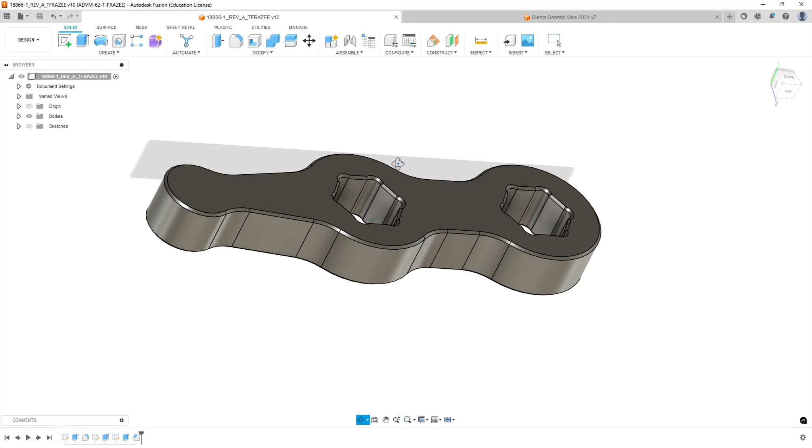This is the CAM tutorial for part number 18866-1 Rev A. We're going to set up the stock and set up the vise for each operation. Our first operation is going to be cutting this held in a vise with parallels and leaving a hat to be removed on the second operation. The second operation is going to require soft jaws, so we'll flip the part over and it'll be facing this way, and it just does the chamfers and cuts the hat off.

So we actually have three programs to do, including a soft jaw to machine. We're going to do this in a methodical way. Let's start off with creating the stock body for the raw material blank.

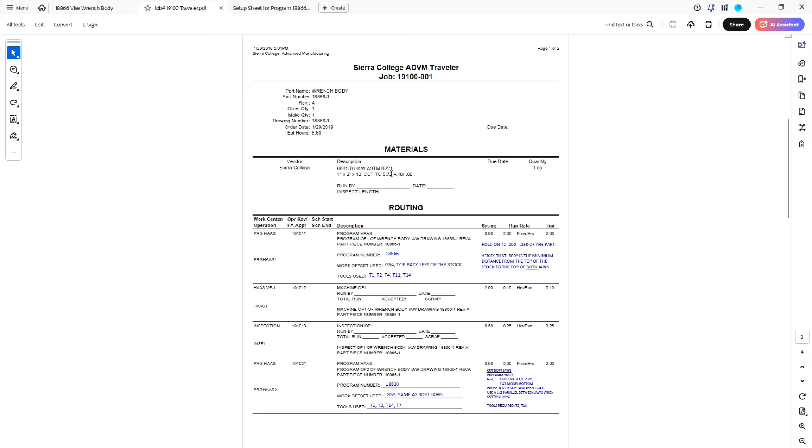If we look at our traveler, our material is 1 inch by 2 inch bar stock cut to 5.72 long, so that's what we want to make. Okay, so let's go.

We're going to start off with a sketch on the top of our part. We'll draw a rectangle and dimension it. So it's 2 inches this way and 5.72 the other way.

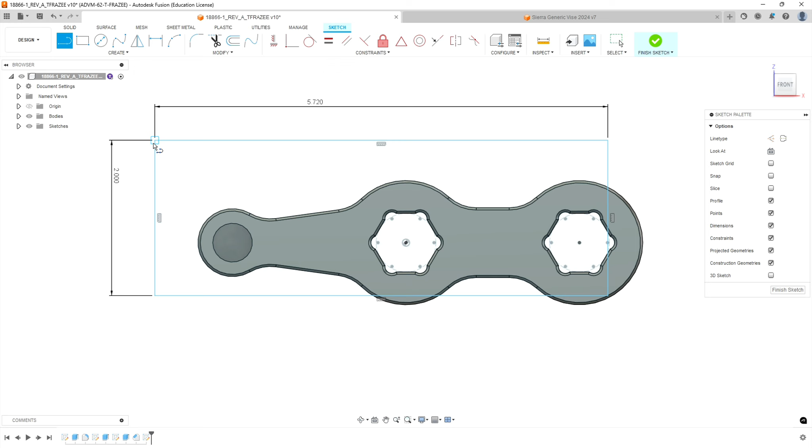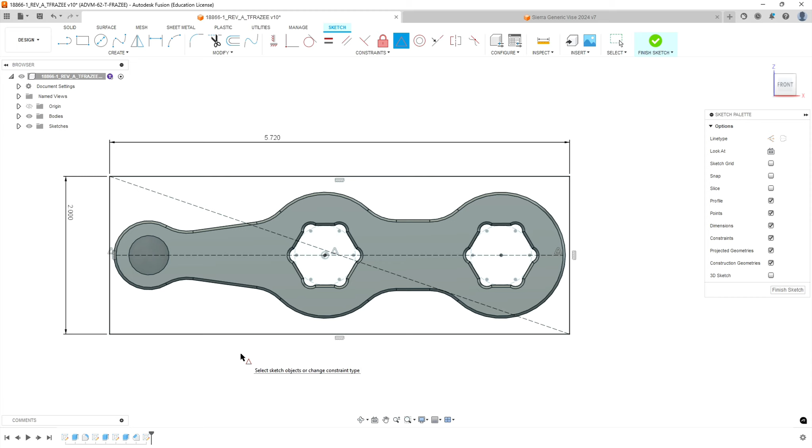Okay, so we've got it centered in our stock. We don't have a huge amount of room on either end, so we've got to be careful when we set this up. We should probably measure that our stock is 5.72. So the next step, we're going to hit finish sketch.

Okay, make sure it's all visible. Not sure why mine was not. Anyway, so what we want to do is leave some material on the top, and the rest of the material will shoot out the other side. We're going to leave 40 thousandths to be removed on the top.

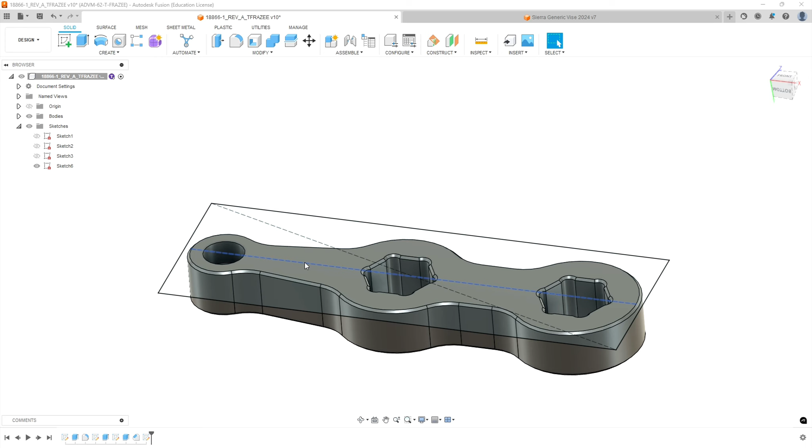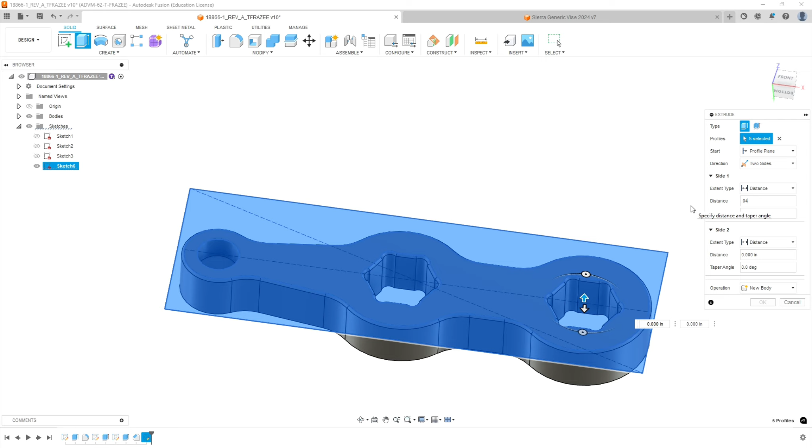So we're going to do an extrude. You're going to select inside of the box, select inside each of these zones. We want to extrude all the way through, and we're going to do two-sided: to the up direction we're going to go 40 thousandths, and in the opposite direction 0.96, which gives us a full inch. We don't want to do a cut, we're going to do a new body, and select OK.

Now let's expand our bodies and highlight the one that says stock, and we're going to label it stock. And this one we're going to label it the part number 18866-1.

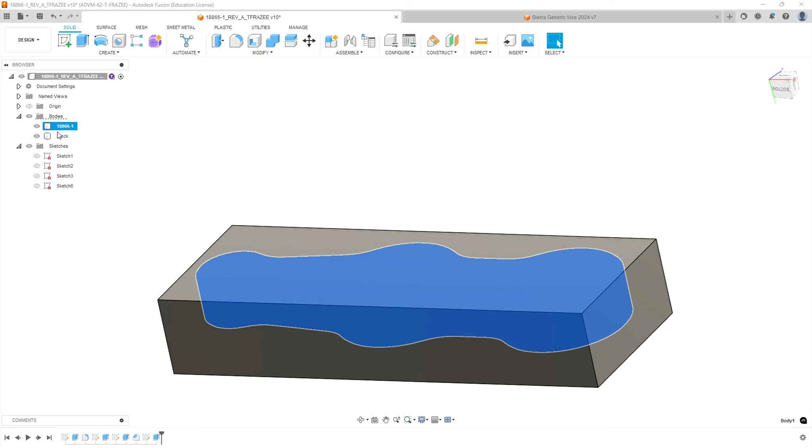Let's highlight the stock, right click on it, go to opacity control, and make it 50% opaque so we can see through it. Alright, so we've got that set up for the first op.

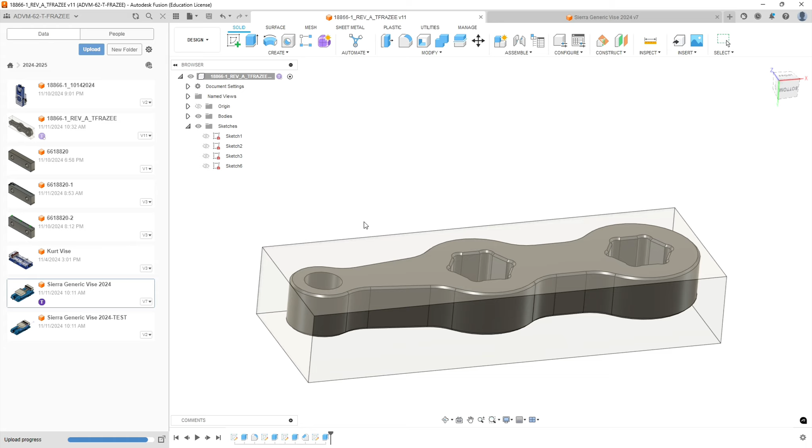Now let's import our vise for the first op. We're going to take our Sierra College generic vise and bring that in. I'll rotate it 90 degrees, and let's move that into a location that looks realistic.

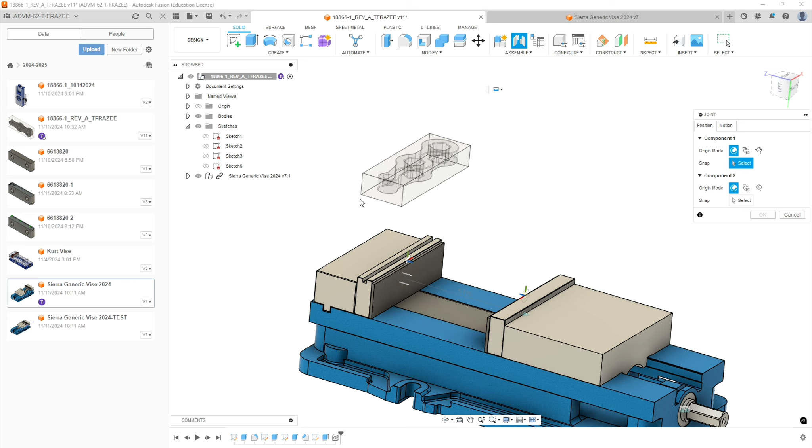We're going to select OK, right click on the vise, and unground it from parent. Now we're going to do a joint. We're going to select the top corner of our parallel, and then the bottom left corner of the stock. It brings it together in a preview.

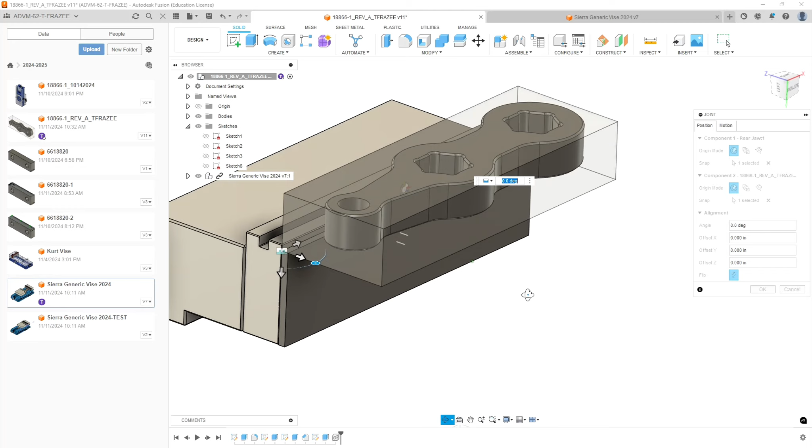And we'll hit OK. Now we go to our vise, and we're going to adjust this spacing to be 2 inches, which will give us a realistic view of operation 1. Okay, operation 2, let's hide the first instance of the vise. Operation 2 is going to be holding this in a soft jaw.

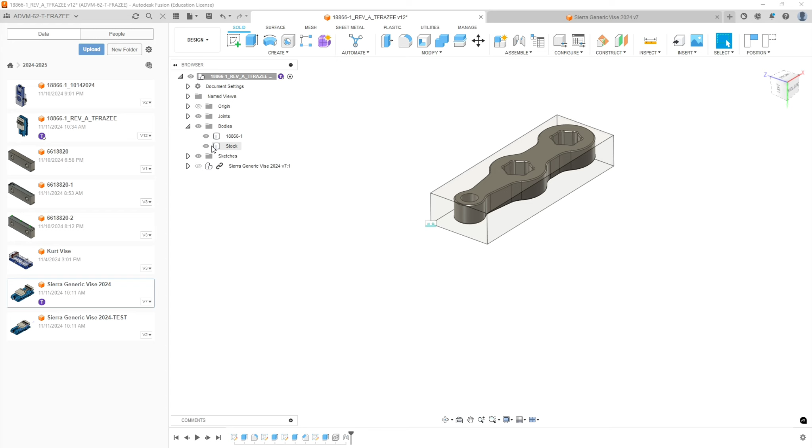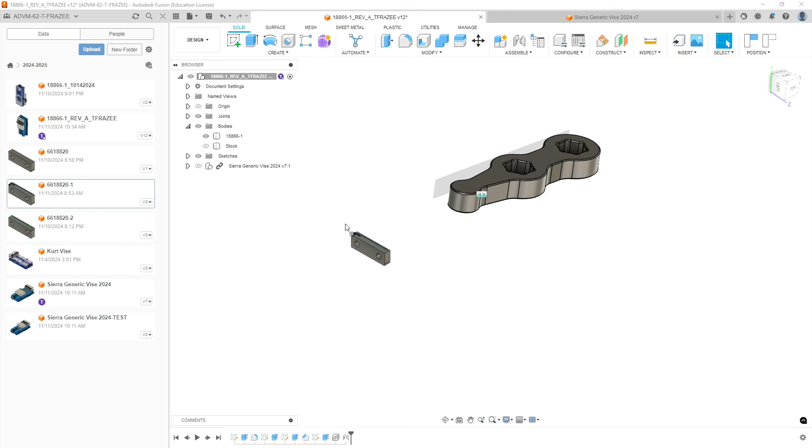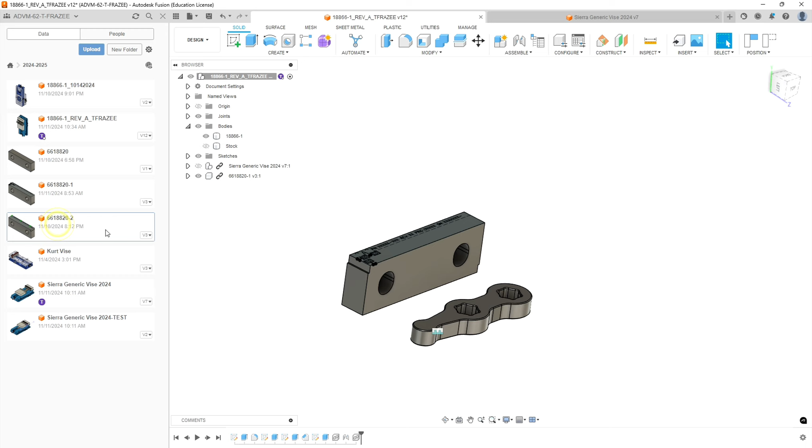And then we're going to do the same thing with the -2, which is the back jaw. And it is backwards. It needs to rotate 180 degrees. Woo. Okay.

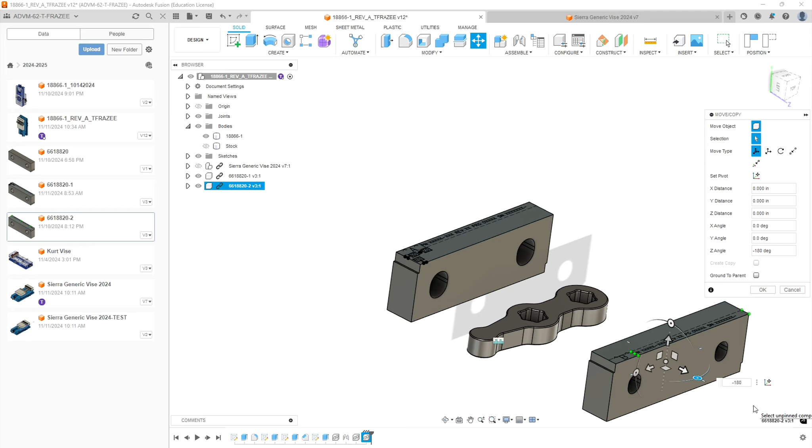And if we look at these, you notice that this one's labeled A, this one's labeled B, and we're going to engrave this information on it. So we're going to need to modify these sketches to match what part we're making. Okay, so

First thing I want to do is mate these jaws together. There's some features that are intentional here. We have this face and this face which need to be in alignment, so that when we take these jaws out and put them back in, this surface we have machined when we make the soft jaw will allow us to align our soft jaws left to right.

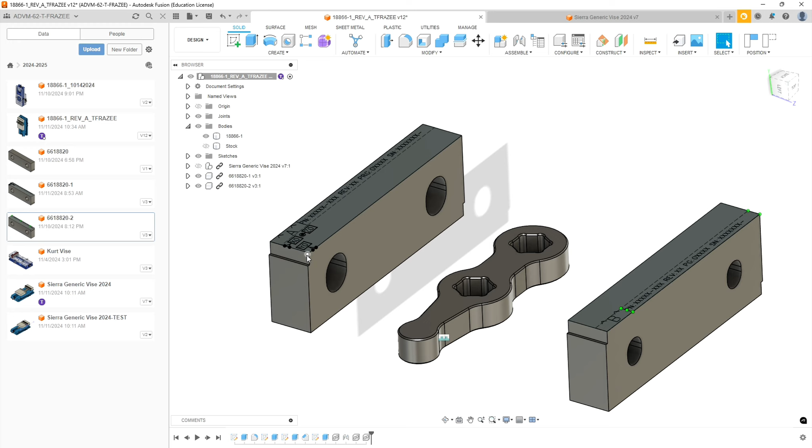So, and then we're going to align the jaws to our part, and this corner here becomes our origin for the machining of both the soft jaws and the physical part.

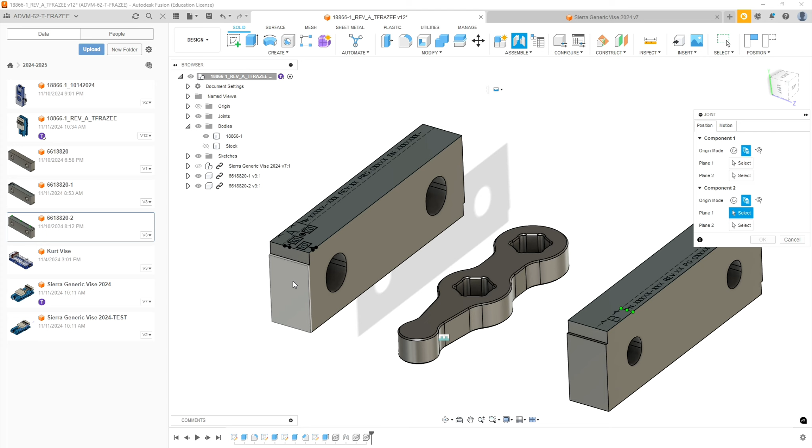Okay, so we're going to use the joint command, and because we have these notches, we don't want to pick on centers of edges. What we want to do is use this second option, between two faces. So we're going to select between two faces on both components, and we're going to select the left and right of one of the soft jaws, and then on the other, the right and left of the other soft jaw.

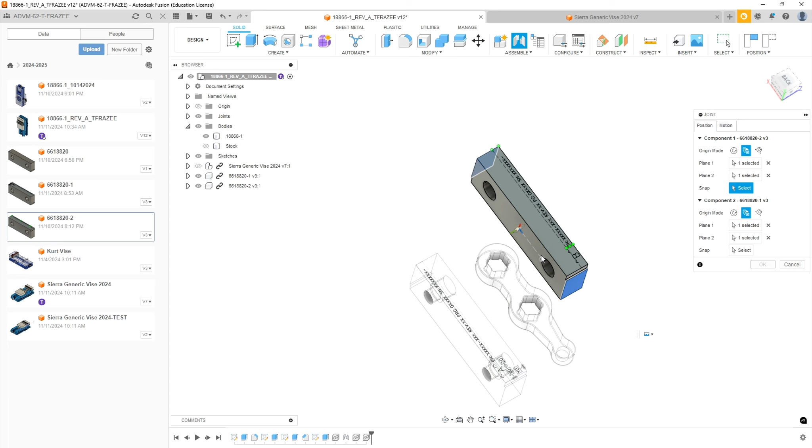And now it's asking for a snap point. We're going to select the snap point of the center front edge, which should be halfway between the two planes we picked, not the edge itself. And then our second snap point will be similar. Okay, now it's going to default to having them touching each other.

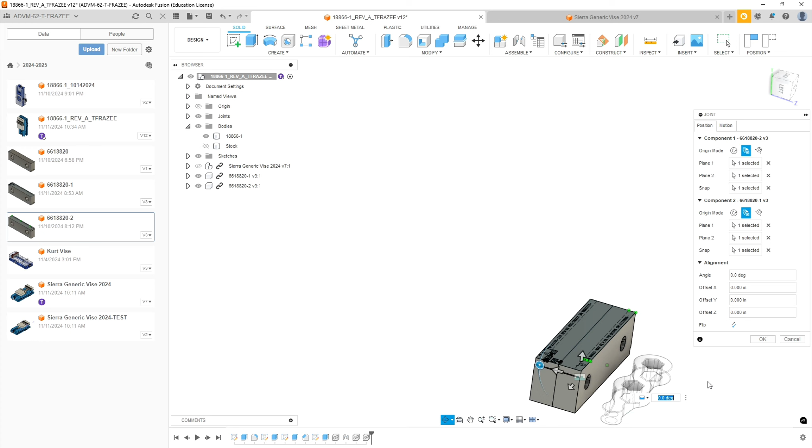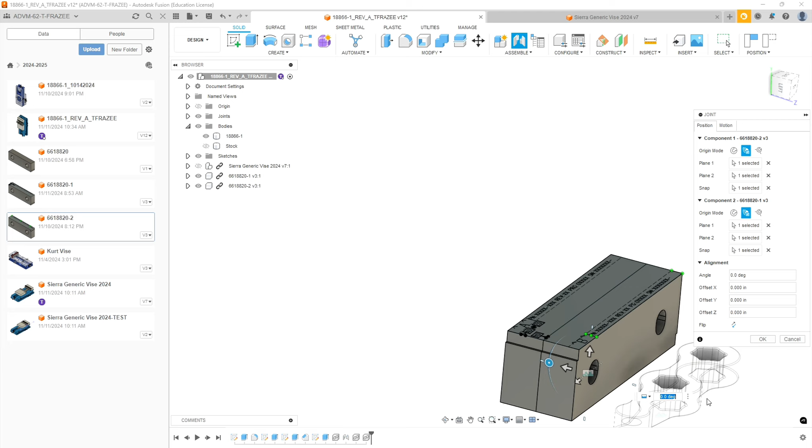What we want to do is back these off from each other so that after we cut the soft jaw shape, we have some room for clamping. Otherwise our part will get loose as that relationship eventually wears out. Okay, so we're going to put a 1/2 inch. So when we actually machine the soft jaws, we're going to put a 1/2 inch parallel in, and then we're going to pull that parallel out when we actually machine parts, so we can put pressure on the part.

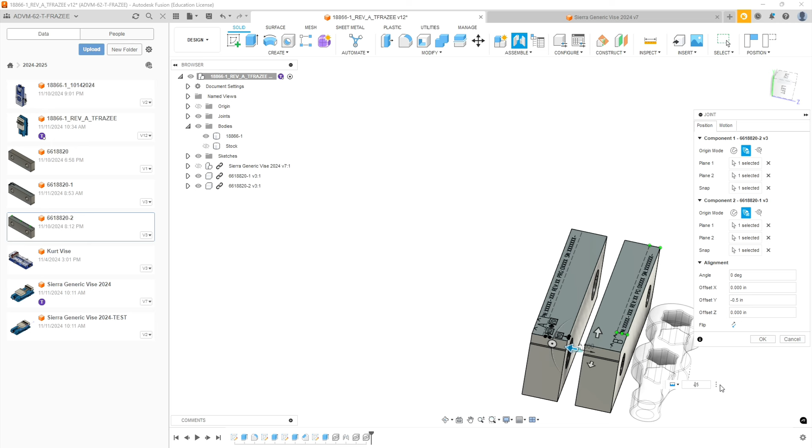Oh, you want to select the axis and put 0.5. I actually had a degree, and we want -0.5. Okay, so they're going to be spaced 1/2 inch apart for this particular item. Sometimes I just clamp any parallel on end in there, and it gives an 1/8 inch of compression. But this is a bigger part, and we want to have room for our text. All right, so let's go OK.

All right, now we need to align this part in relationship to our origin. So when we do that, I'm going to pick up on the center of something and then use an offset to place it, and then we'll use the geometry of the model itself to make the soft jaw.

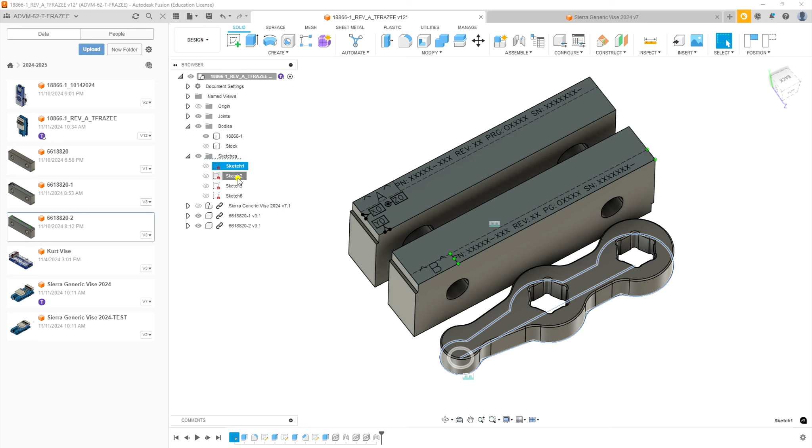We're going to open and expand our sketches, and we're going to find the sketch we used to make one of our hexes. So we have these different sketches. Now, you may have approached yours differently than I did. It's okay if you don't have this point. You'll have to find center. You might have to draw a sketch, but find center of this center hex. Okay.

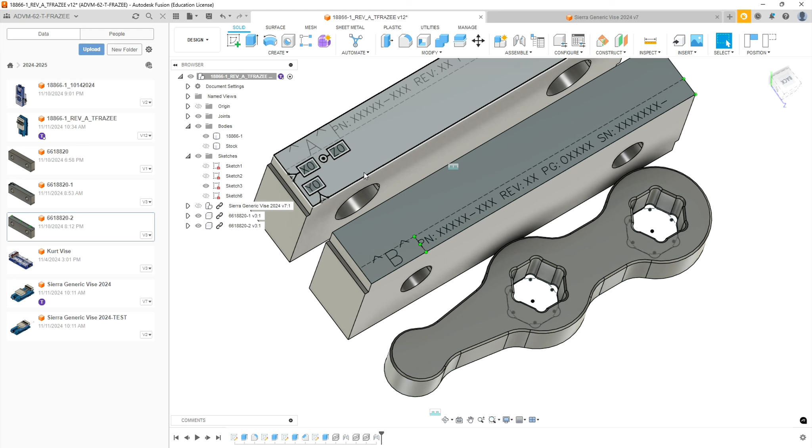And what we're going to do is we're going to do a joint between this corner here and the center of our hex. Okay. Now that's obviously not where we want it. But we want a relationship that we can document, and we can know where the center of this is based off that corner, because we're building to our fixture.

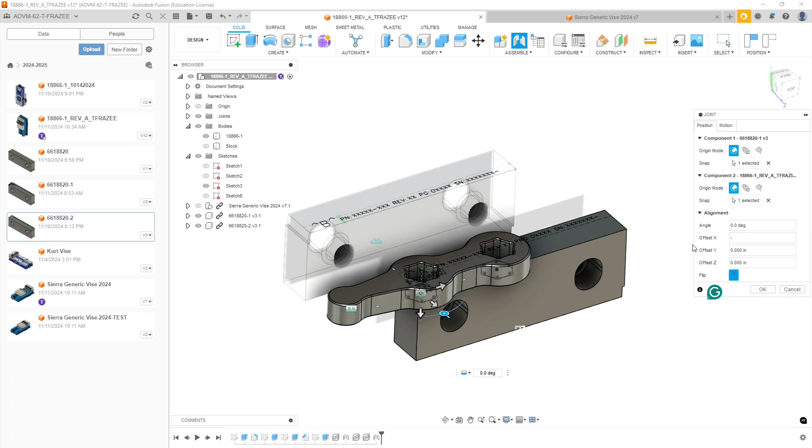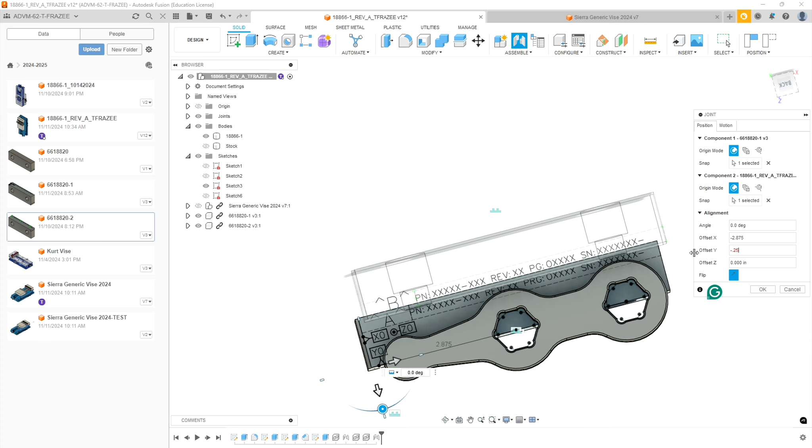Okay. So we're going to go over to the right. We're going to shift in X, negative 2.875. We want to center this object in the center of the two jaws. So our center of our two jaws is shifted in Y, negative 0.25. Okay, because we don't want to capture beyond half the radius on one half of the jaw, or we'll have problems. Okay, this is going to wipe out a little bit of our lettering or get really close to it. That's okay, as long as we know where our Y origin is.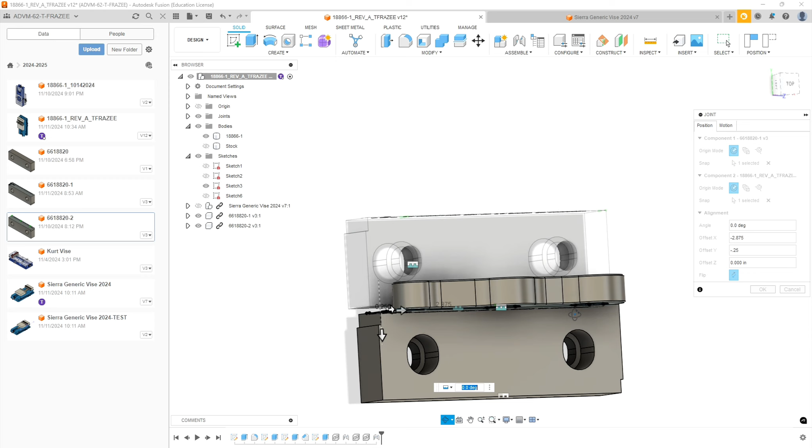Okay. And then now we want to sink it down into the soft jaw. So we're going to go Z offset negative 0.4. And that's going to sink it down 400 thousandths into the soft jaw. Okay. And so this is where our soft jaw is. We are going to take a look at this.

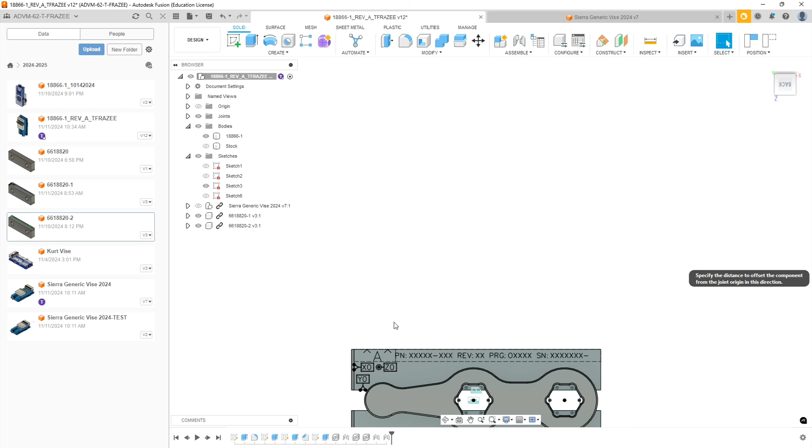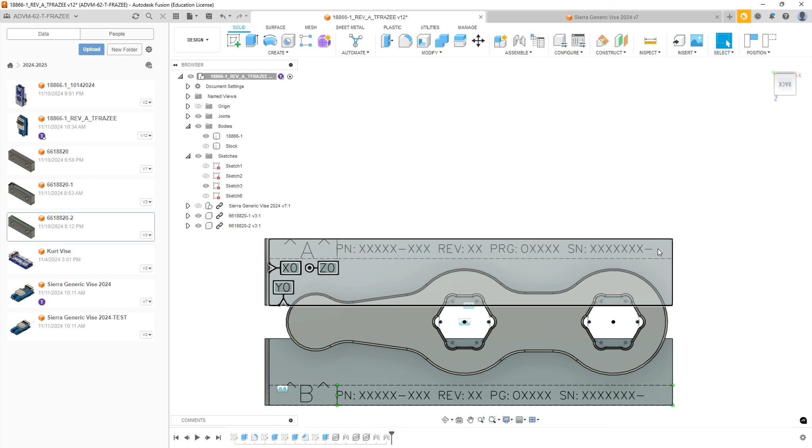So in this view here, we can read all our documentation. We want it engraved on both halves, so if they get separated from each other, we know which one's which. The serial number, we're going to change that to being your student ID number, and then if you make more than one of these, we're going to stamp a number at the end. That way we have this serial number matched with this serial number, and again, if we have multiples of these jaws, we can find them. All right.

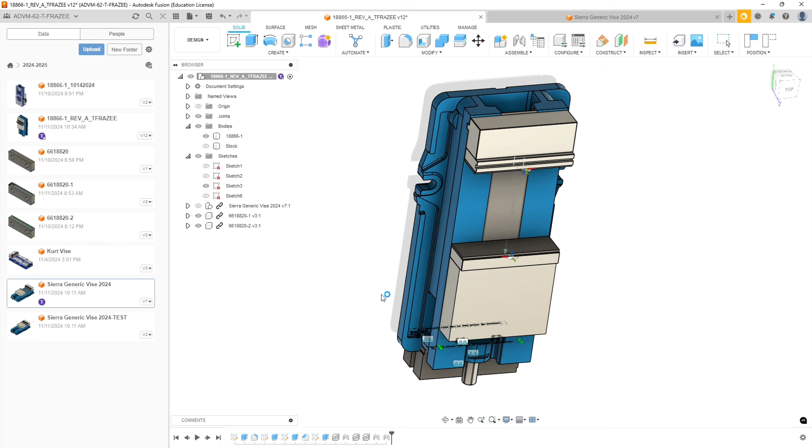Now, let's take this whole assembly and let's put it in another instance of the vise. So we're going to bring in our Sierra College vise, the generic vise, and we're going to rotate this down to 90 degrees. And move this over. And these jaws are going to replace the steel jaws that are in this.

Okay, so we're going to hit OK, and we're going to open up our second instance of the vise, and we're going to open up the rear and front jaw, and we're going to open up the bodies. We're going to make the hard jaw invisible, the two bolts invisible, and the parallel invisible. Still there, but we're not going to see it. Do the same thing with the front jaw. Okay, so the bolts and parallel. Okay, now we can collapse all this back up,

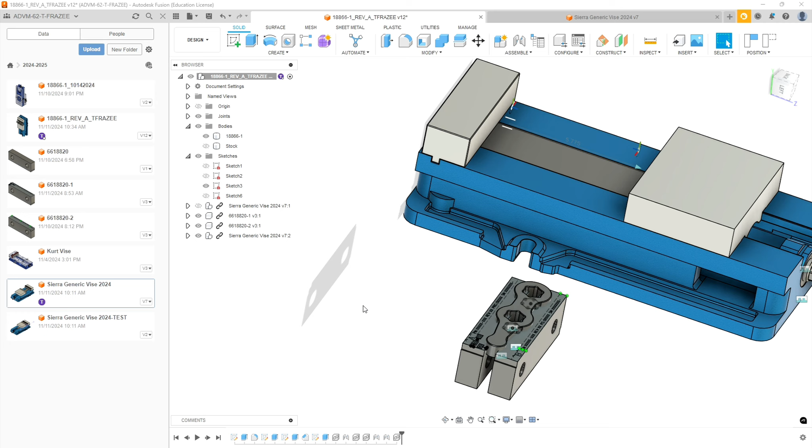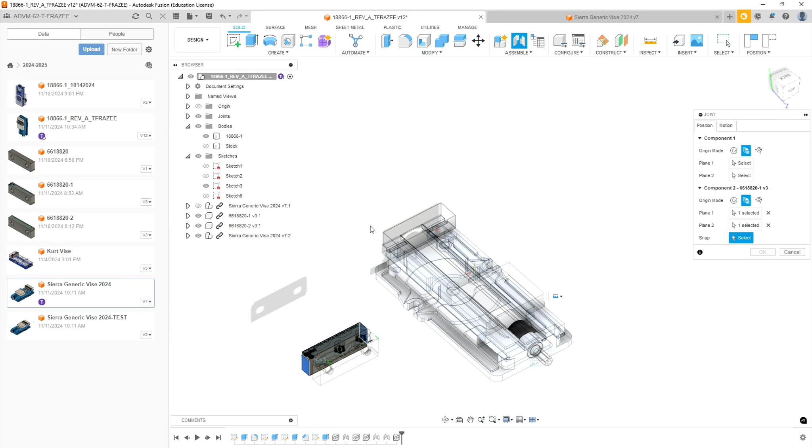and then we're going to mount these jaws in the vise. So how we're going to do that is the same way. We're going to take the assembly command. We're going to use the between two faces command. Pick the two faces of our rear jaw, and then we're going to select the two faces. Oops, that was not it. The two faces of our rear block.

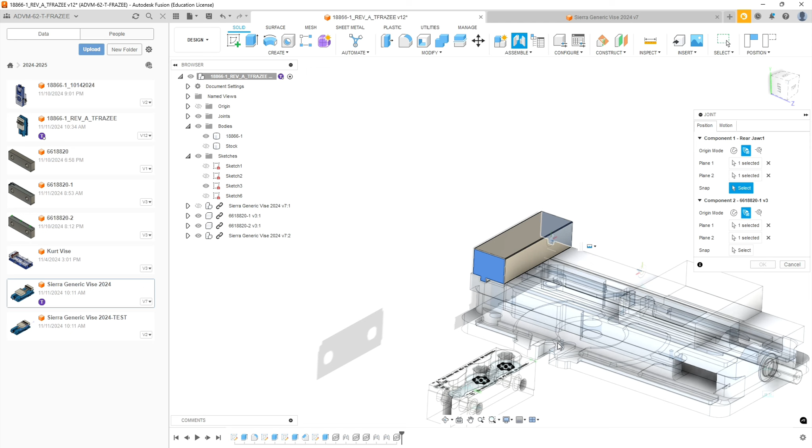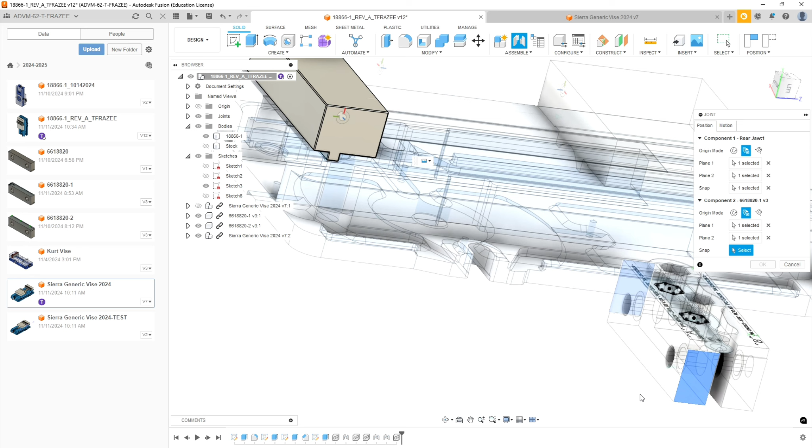And then it's asking for the snap point. So our snap point on the rear block of the vise is going to be here. Now note there's a chamfer on this, so we're going to have to adjust for that chamfer because our vise jaw does not have that. Okay, don't be disturbed by that. Preview, okay, always does that.

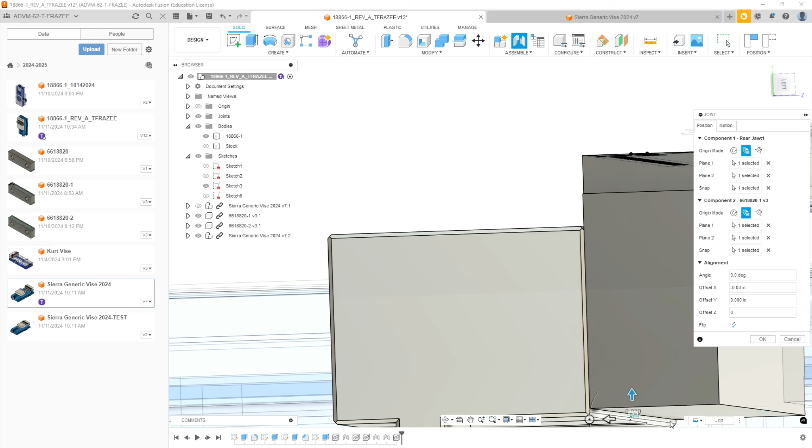And you notice our vise jaw is sitting above the end of the chamfer. That chamfer is a 30 thousandths chamfer. So we're going to pick the axis that we want to shift it, and we're going to put in negative 0.03. All right, I'm wrong. We're going to put in 0.03. Okay. So now they should be flush when you look at the side here. Okay. Now we hit OK. And all we have left is to adjust this back jaw.

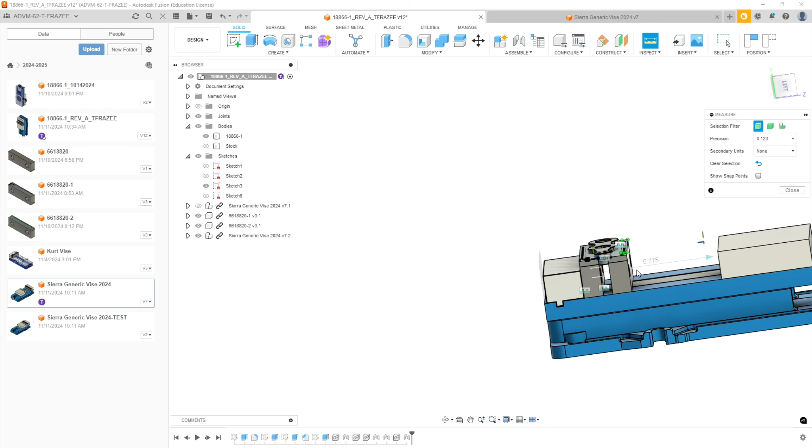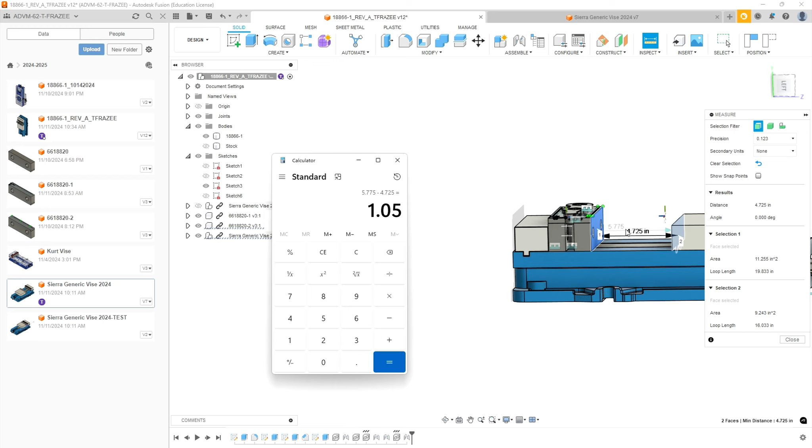So if we measure the distance between our soft jaw and the block, we get 4.725 inches. We need to subtract that number from the 5.775 to get the number we need. So let's just do that real quick. 5.775 minus 4.725 gives us an inch and 50 thousandths. So let's go back to this screen.

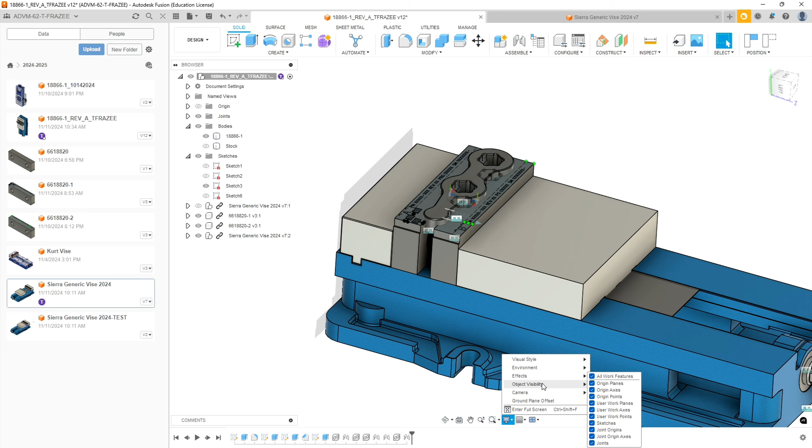This becomes 1.05, 1 inch 50 thousandths. Okay, so we've got this pretty much set up. One thing I do like to do is I'm going to go to displays, and now that we've got all our assemblies done, we're going to go to object, visible objects, and we're going to make joints and joint origin and joint axes invisible. That way we don't confuse that on our documentation when we go and make this.

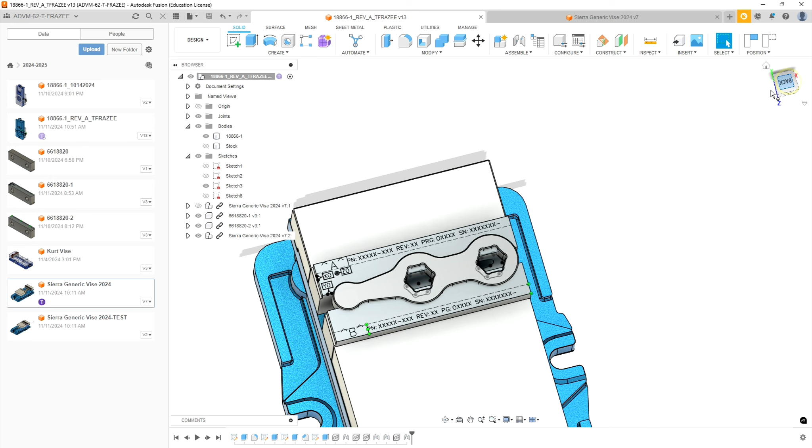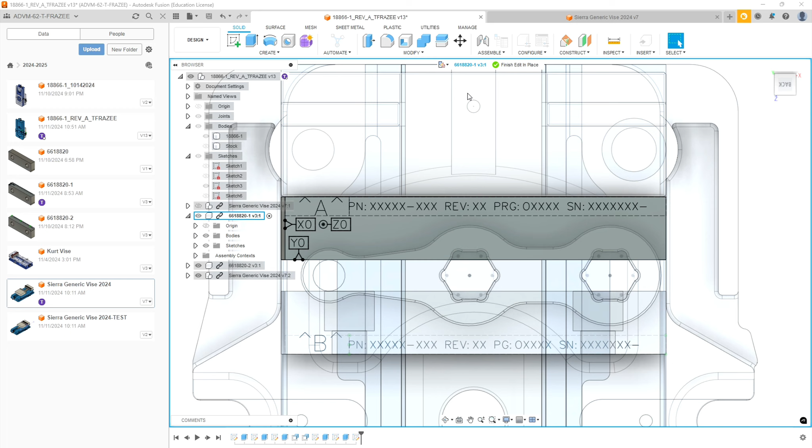Okay. All right, now we need to look at our soft jaws here. So let's go to the back view, and we're going to have to modify these. What we want to do is modify these in place so that it doesn't affect the original. Edit this, and we want to capture the position. And up here where it says edit in place, we want to go non-associative. That way it doesn't change our template soft jaw.

And now that'll allow us to go in and we're going to modify the sketch that has the text on it. And we're going to edit that. So what we're going to do is we're going to modify this text to actually have the information we need on it. So we're going to double click on the part number first, and we're going to replace the X's with the actual part number. So the part number of this part is 18866, and then it's -1. And the revision is A.

Make sure everything's capital. And the program we're going to run to make the part, this isn't the program for the soft jaw. The program we're going to run is going to be 8661, so the last 4 digits of the part number, and it's going to be program number 2.

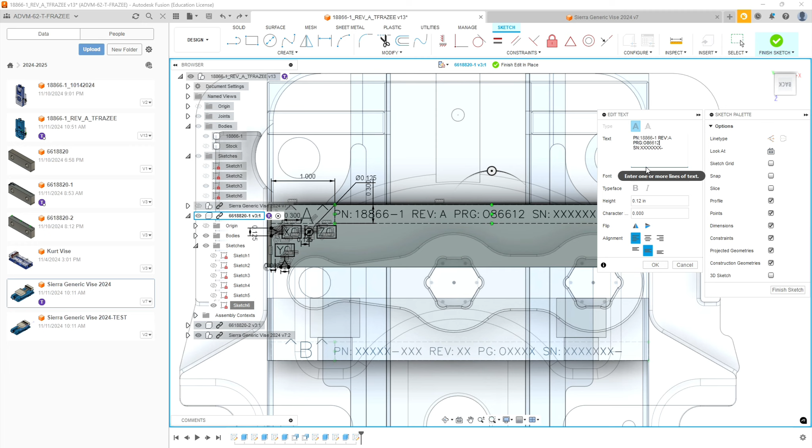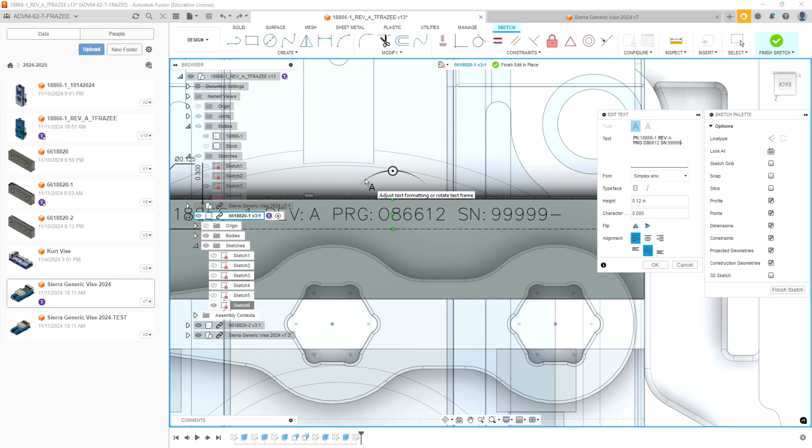Okay. And then our serial number, that's going to be your student ID number, or in my case my employee ID number, but I'm not going to put my real number on a tutorial. Okay, so replace this serial number with your student ID number, however many digits that is. It should fit. Okay, so we've finished all of that.

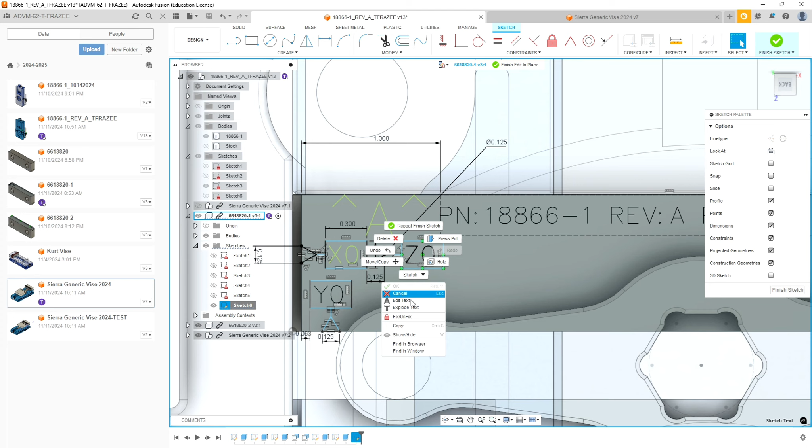And all of this other text here, we're going to explode it, but we're not going to change it. So we're going to explode text here, explode text here. It should all turn green. Now if you did have to change this, you could change those. But once we've exploded this stuff, it's really hard to change it because it's all line entities. Okay, so now let's go to the next.

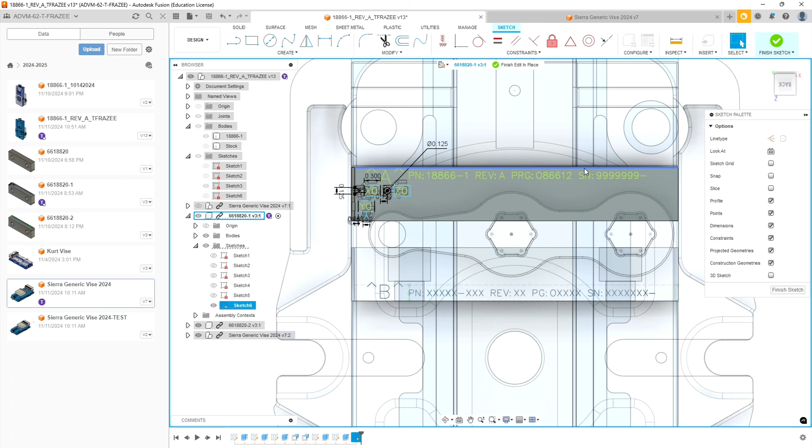Okay, so now once we've exploded all the text, it should all be green. It can be engraved. Your sketch is not going to be fully constrained, but we're not going to dimension each of these things. But make sure your text is correct before you explode it, because you can't just type it to change it. You have to actually redraw it.

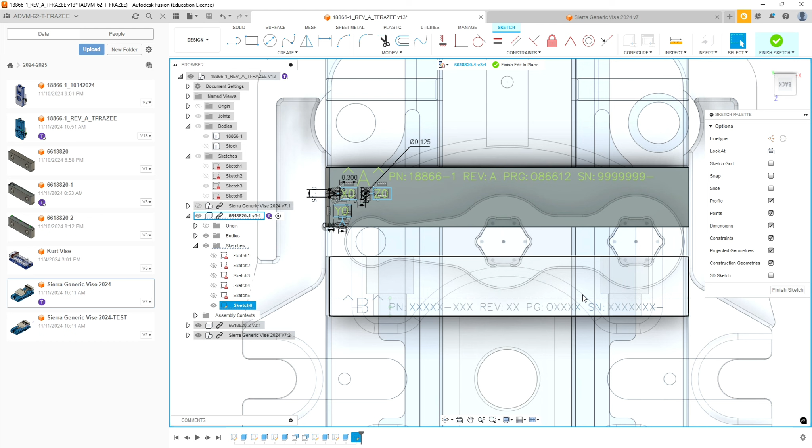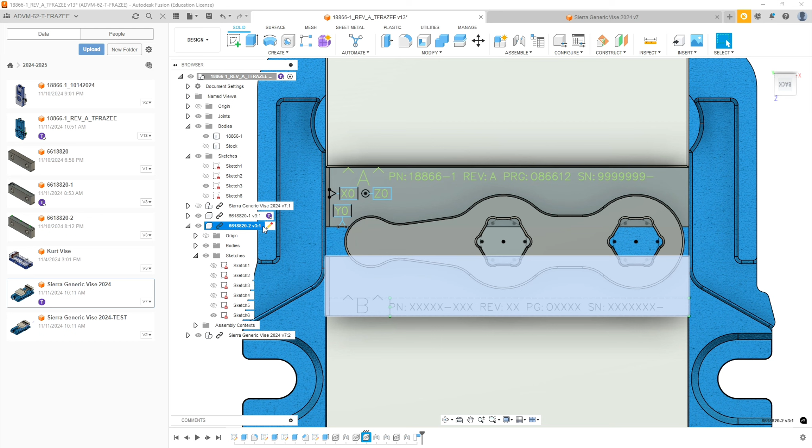Okay, so we're going to finish this edit in place, and then we're going to edit in place the lower one. So let's minimize the sketches in the -1, now we're going to go to the -2, and we're going to open up the sketches. We're going to edit that one and make sure we flip non-associative. Okay, and then we edit the sketch. Not sure why it does that.

Now we're going to modify this part number to be the same as what we just did on the top. So 18866-1. Rev A. And the program number should match. We're putting it in both places, so we just make sure that we get the right two jaws if we pull these out of the stockroom. 86612, and then we're going to have our student ID number.

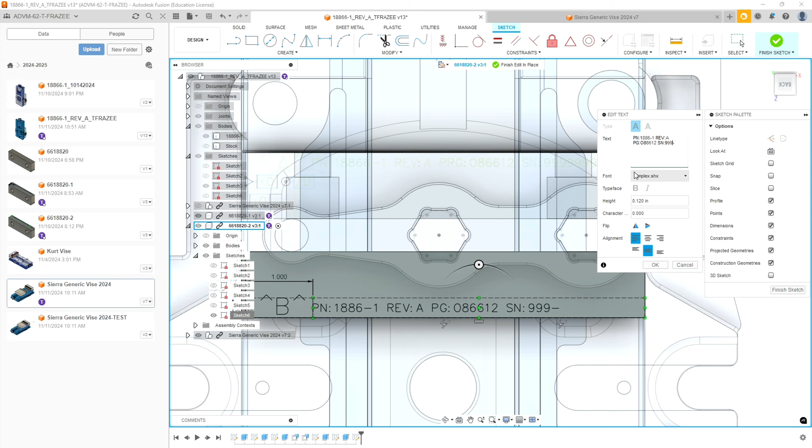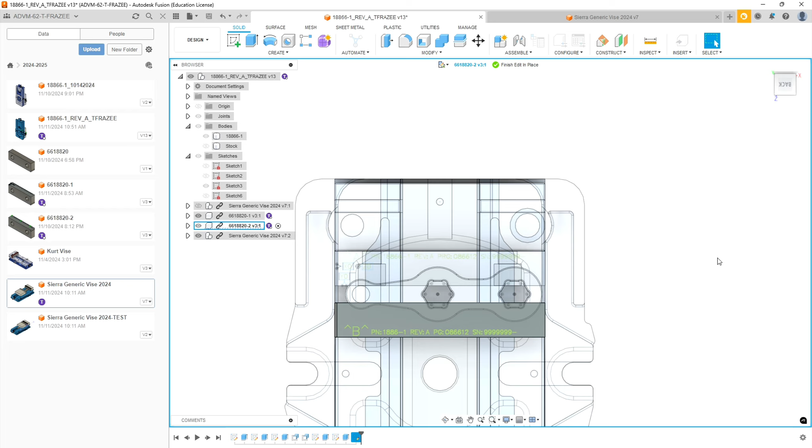1, 2. Okay, now we need to explode all this text. So we're going to right click on the letter B. We're going to say explode text. Right click on the other letters, hit explode text, and we should get green all around, and hit finish sketch. Now let's minimize all this, and then we're going to finish edit in place.

Alright, we should be good to go to program this. That way we don't have to keep coming back and forth between design mode and manufacture. Let's go to sketches. Let's hide that sketch I had to center the part, we don't need it anymore. Okay.